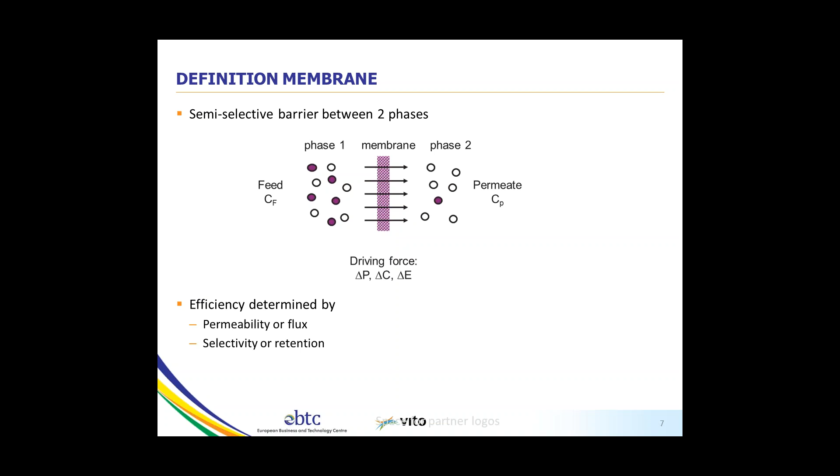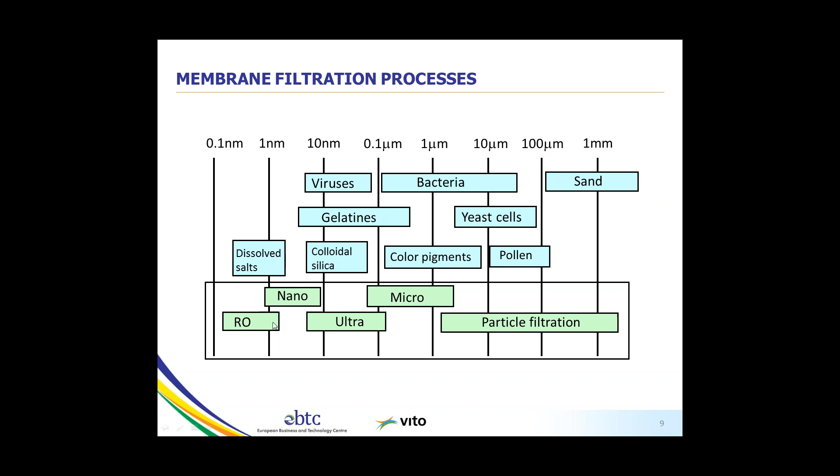This gives an idea: with microfiltration, you remove all the solids and part of the bacteria. With ultrafiltration, you have better removal of microorganisms, which is also important if you want to reuse the water, for instance in drinking water applications. Nanofiltration and reverse osmosis are used mainly for desalination.

The membrane market is a growing market, with a 10 to 20% annual growth rate. With the pressure-driven processes applied in water applications - microfiltration, ultrafiltration, reverse osmosis, and nanofiltration - you have more than 75% of all membrane applications. So it's the big market, so to speak.

The classification of membranes - well, you can choose different parameters to classify them.

Pore size is the usual way to classify them, as I mentioned before. But you can also classify them according to the structure of the membrane. The membranes used in water applications can be homogeneous, made of one material, or they can be heterogeneous.

Most of them are porous, and reverse osmosis is non-porous. Most of the membranes used in water applications are polymeric materials, but you also have inorganic membranes, like ceramics, used in water applications,

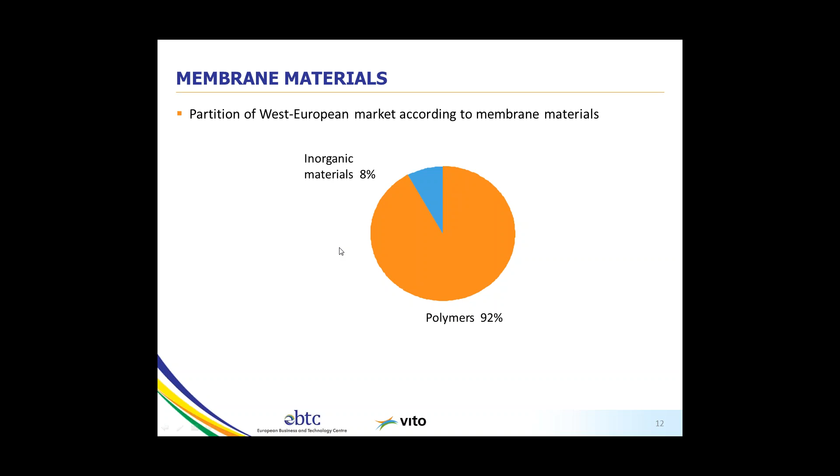You see that the majority of the membranes used worldwide, and certainly in the West European market, are polymeric membranes. It's only a minority that consists of inorganic materials, and most of the time they're used in wastewater under severe conditions, with acids, extreme pH, etc. So for classical water applications, normally you use polymeric membranes.

And pressure-driven membranes normally have a very thin skin layer, so they are asymmetric. The skin layer gives you good selectivity, and underneath you have either a finger-like structure or a sponge-like structure. Both exist in the water world, but this structure is necessary to give mechanical strength. It's only in the skin that you have selectivity. This is, of course, to have high fluxes and good selectivity.

The types of materials used, most of the time, are either hydrophobic polymers, PVDF, polypropylene, and Teflon, but for classical pressure-driven processes it's most of the time PVDF or polyether sulfone. For reverse osmosis, it's a thin film composite structure with polyamide on top of a classical polysulfone ultrafiltration layer. So it's an asymmetric structure, and it's non-homogeneous. You have two layers on top of each other.

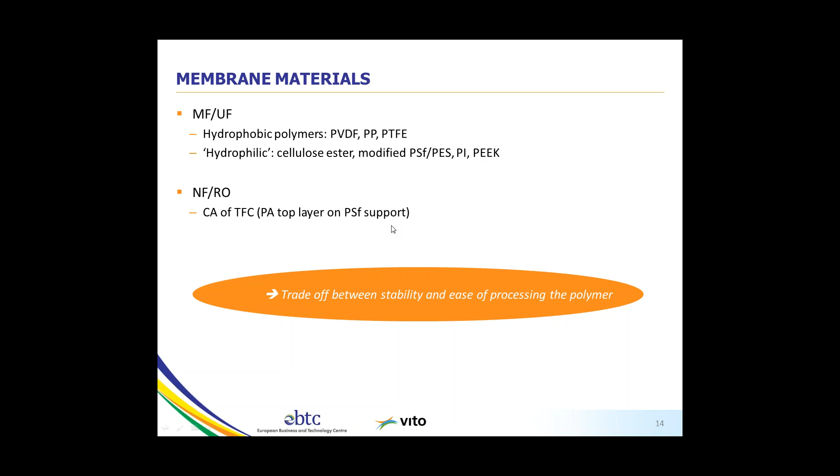The module configuration: you have flat sheet available. In water applications, normally the flat sheet is wrapped around a tube for permeate collection, and this is the way you make spiral wound membranes. I would say 90% of the membranes in water applications are spiral wound. If they are flat sheet, they are in spiral wound.

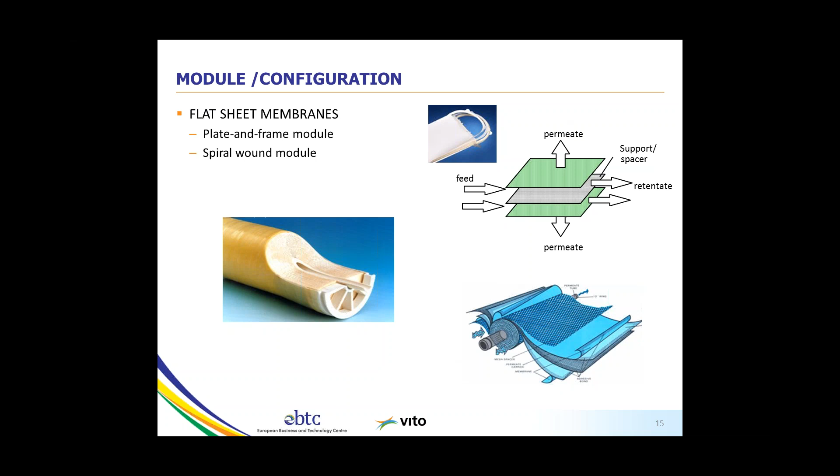The flat sheet can also be used as a flat sheet in a stack, and that is then for membrane bioreactors. The spiral wound modules are mainly used in reverse osmosis and nanofiltration.

Tubular membranes, you subdivide them depending on the diameter of the tube. You refer to tubular if the diameter is above 5 millimeters. These can be used in MBR, membrane bioreactor applications. Capillaries have a diameter between 0.5 and 5 millimeters, and hollow fibers are very thin, with a diameter below 0.5 millimeters.

At the edges, you need to pot them in an insert, and this is the housing of the hollow fibers. At the end you need a sealing, and this is done, most of the time, with a resin used for potting. Then you have the possibility to flow from the inside of the capillary to the outside, which is called inside-out filtration. Or you can flow from the shell side to the inside of the capillary for extraction of the permeate, which is called outside-in.

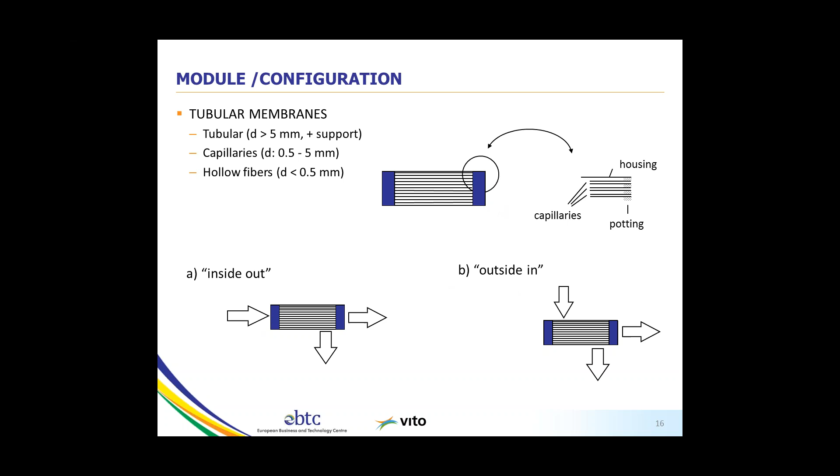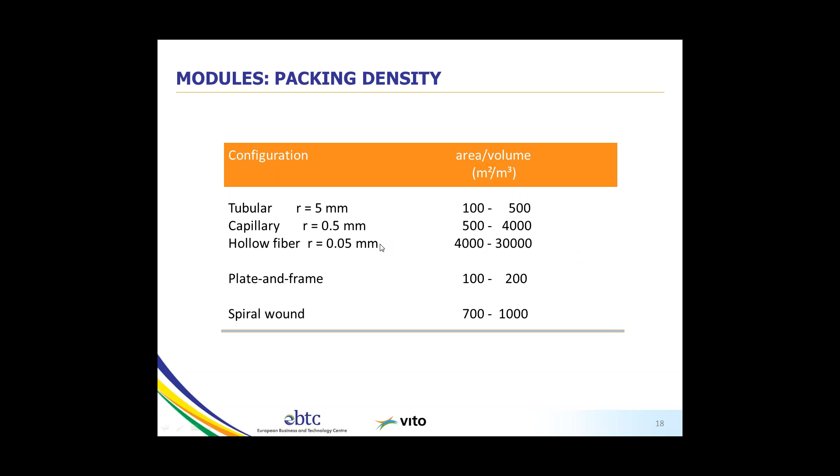Another way to look at packing density is area per volume, square meters per volume of the module, and you see that the champion for this parameter is the hollow fiber configuration. So if footprint is important and water quality is okay, you normally choose hollow fiber, if available, of course.

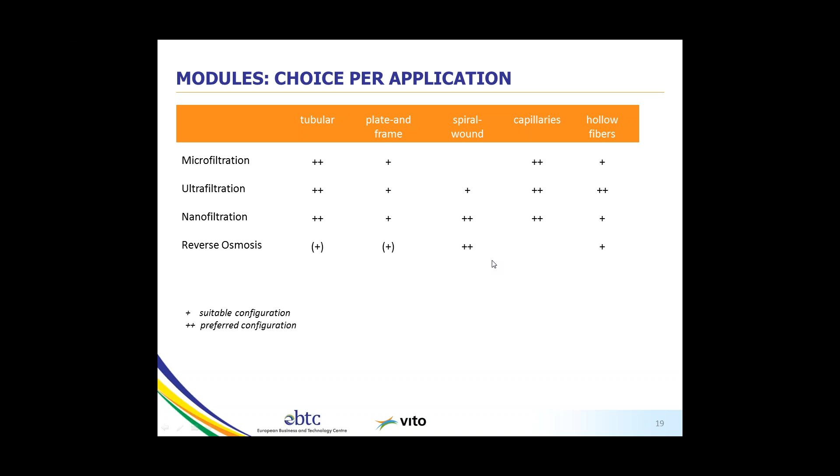And here is the availability: micro and ultrafiltration are available in tubular form, capillaries, and hollow fibers. Nanofiltration and reverse osmosis are most of the time in spiral wound configuration, so then you don't have the choice, of course.

Mode of operation: you can operate in dead-end, meaning the feed flows perpendicular to the membrane surface, like a coffee filter. Another way is you flow the feed across the membrane, and part of it is converted into permeate, whereas in dead-end filtration 100% is converted into permeate.

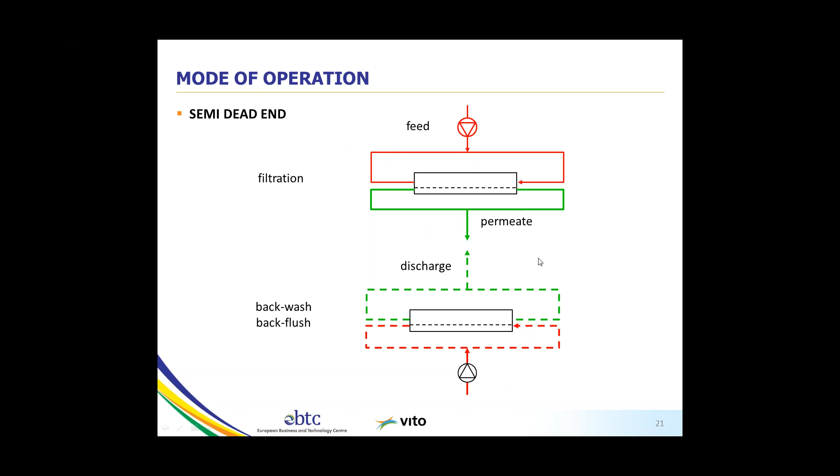A semi-dead-end operation combines a dead-end operation mode with a backwash. From time to time you reverse the flow and backwash the filter with clean water, and of course you have to discharge the cake layer.

Then you can choose for a single pass-through, or one pass-through, meaning the feed passes one time through one membrane module, or you can recycle part of the flow.

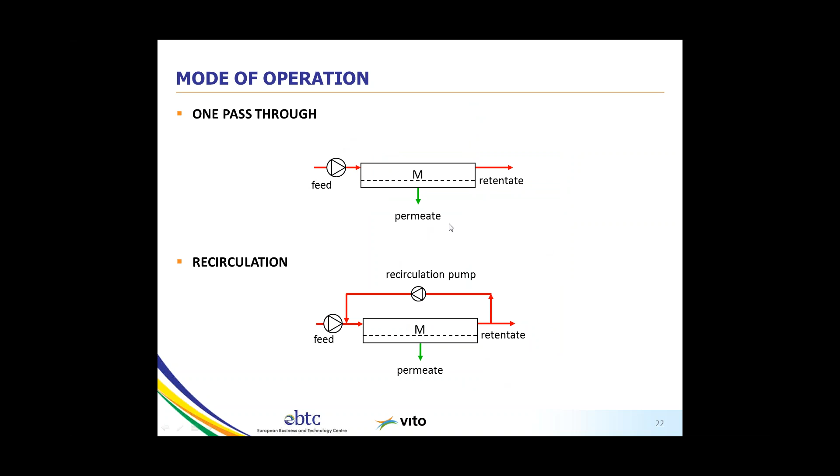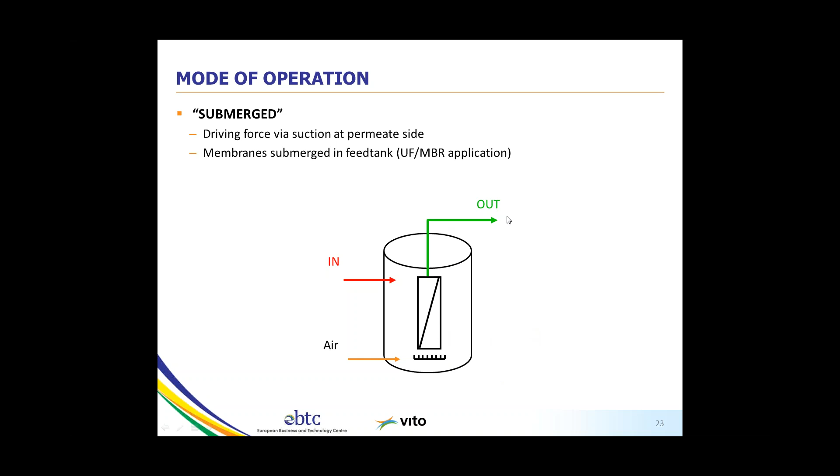This is a typical configuration for membrane bioreactors. In that case, you submerge the module in the tank, which we call the membrane tank. It's filled with sludge, and you suck out the permeate, so it's an outside-in filtration, typical for membrane bioreactors.

If you have a multi-stage system, you can go to higher recoveries. That's the reason why you stack them in a multi-stage configuration.

Let's go a little bit deeper into micro and ultrafiltration. We've seen in the last 10 to 15 years a real boost in micro and ultrafiltration as a replacer of classical sand filtration, for instance.

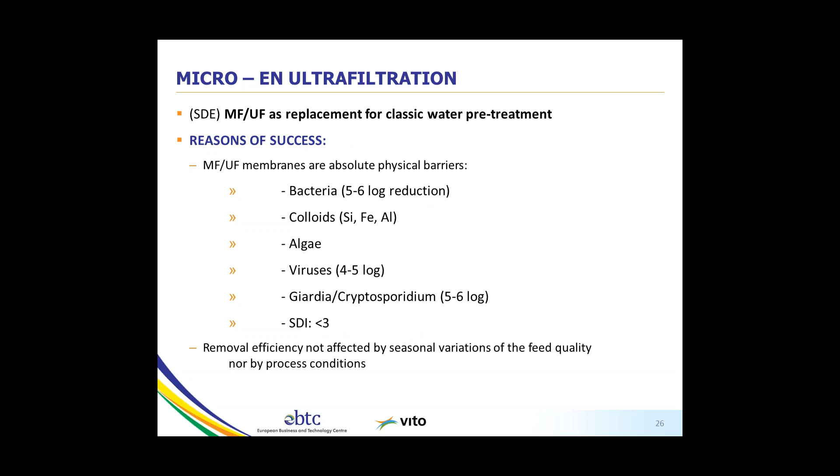Why? Because micro and ultrafiltration form an absolute physical barrier. That means bacteria, viruses, algae are retained nearly 100%. Here you see the log removal, so they are very well retained, certainly by ultrafiltration. This is important, you create very good quality water for irrigation purposes, or to post-treat, for instance, with reverse osmosis.

One of the reasons UF and MF are so successful is the development of hydrophilic membranes. Remember PVDF, which is in fact a more hydrophobic polymer, but there are ways to make it more hydrophilic so that you have higher fluxes. You can do this by surface modification, or with a blend of polymers. The result is a low pressure, high permeability membrane, with less fouling because there's less compaction of the cake layer.

We see a lot of improvement, and for surface water treatment, for instance, a classical yield is a flux of 100, which is quite high, with a membrane lifetime above 5 years. This is true for all membranes - they are modular and have a small footprint. These are other advantages.

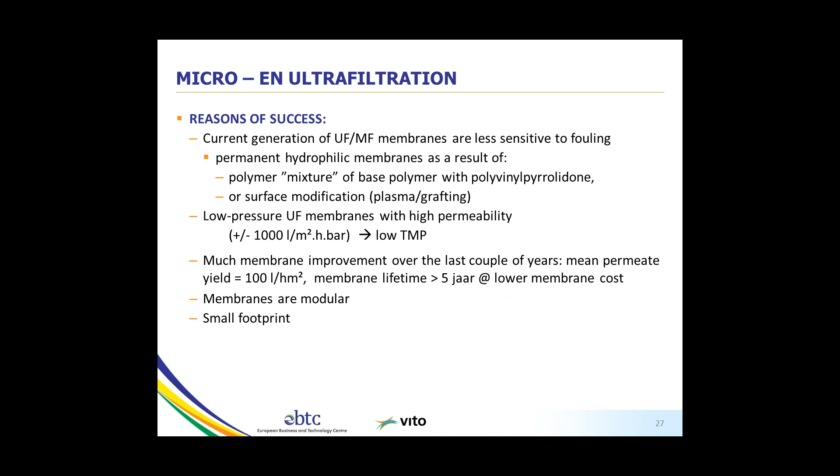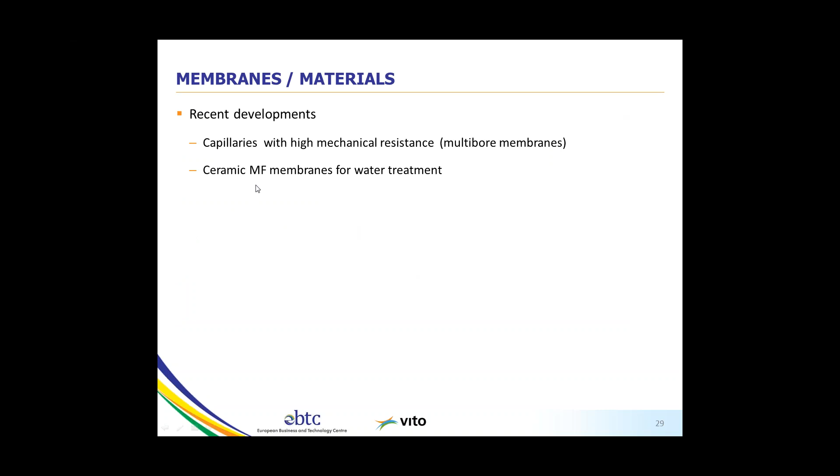As for recent developments, these are the multi-bore membranes of Inge. Inge is now taken over by BASF, but it's a new development. There are also ceramic MF membranes for water treatment.

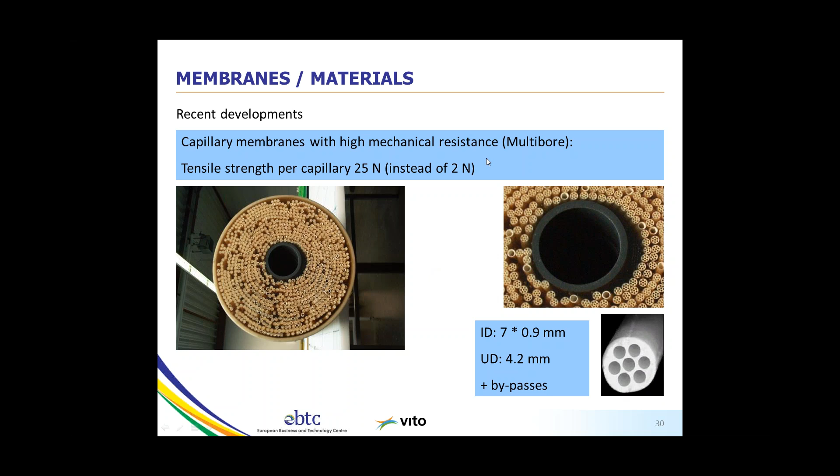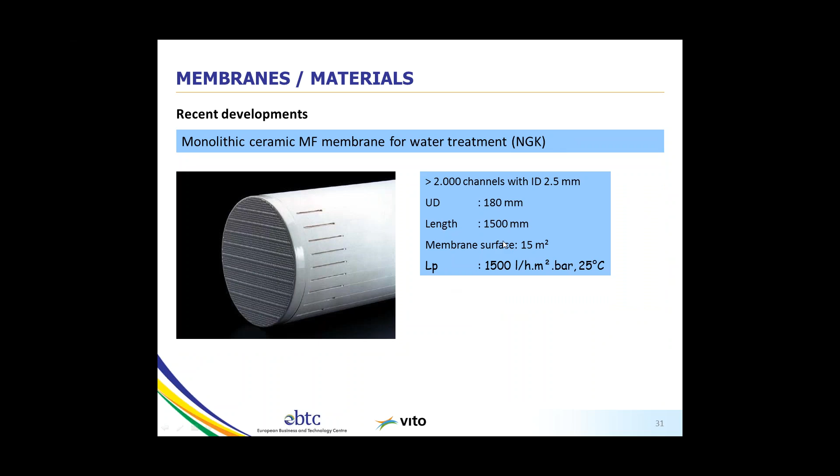And here you see the ceramic microfiltration. This is a Japanese development from NGK, and they claim very high fluxes.

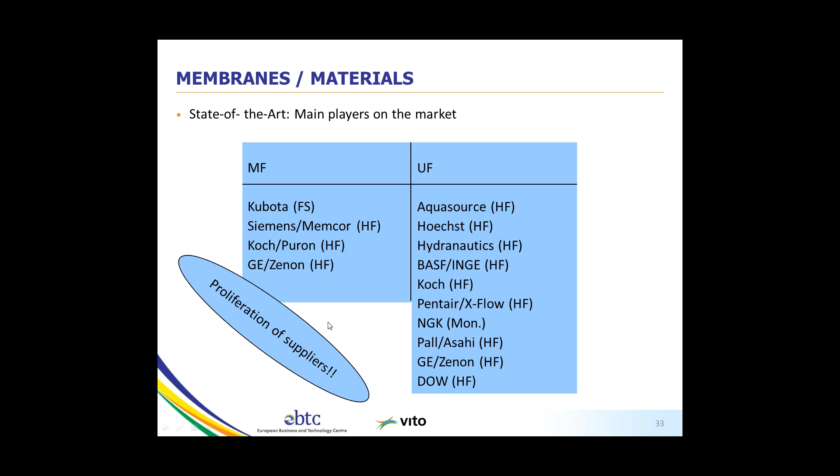This is a list of suppliers. Kubota is number 1 in MBR, flat sheet. HF is hollow fiber, FS is flat sheet. Here you see a number of well-known suppliers, for instance Dow, GE - these are the really big ones. But there is a huge proliferation of different suppliers, and they all have their own configuration and module size.

So what do you need to choose in case of an easy water? Easy waters are low in suspended solid content and low in organic content. Then you can choose for a small diameter and inside-out filtration. But if you have more difficult waters with high suspended solids, high organic contamination, and even sludge, then you have to choose other configurations.

For instance, if you still want to choose a small diameter, we recommend outside-in filtration. We also recommend a larger diameter, or even submerged systems with hollow fiber modules. Then there is a reinforcement on the hollow fiber so that you can backwash. And of course you also have the flat sheet for more difficult waters.

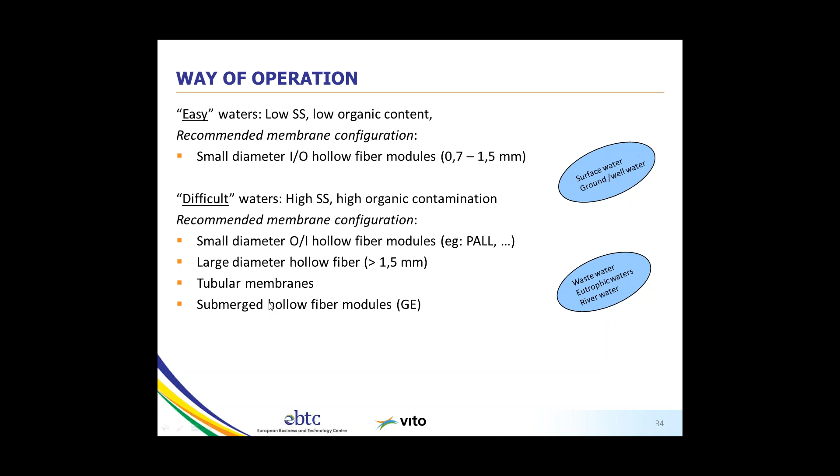For easy waters, you can choose a semi-dead end operation for surface water and ground and well water, but for more difficult waters, we recommend cross-flow.

This is a typical semi-dead end operation for surface water treatment, but also used for MBR applications. You have a typical cycle in dead end, then you revert the flow, and then go into backwash, and start again a new filtration cycle.

This is when the operation is very stable. You start after the backwash again at the initial TMP, so you have no fouling on your membrane. You only have a cake layer built up, but no irreversible fouling.

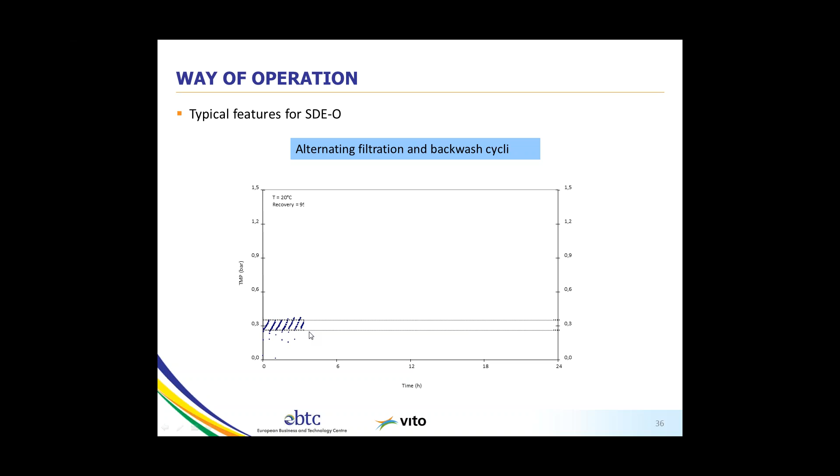A typical filtration cycle in semi-dead end is 20 to 60 minutes, and these are the typical fluxes. The backwash is typically 20 to 60 seconds, and the flux of the backwash is normally higher. This is to have some force on the membrane to remove the cake.

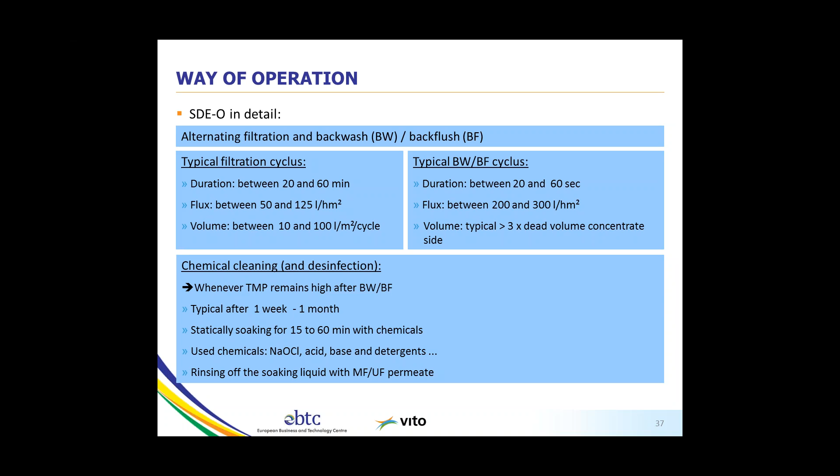Of course, you need from time to time a chemical cleaning. You can do an enhanced maintenance cleaning, once a week for instance. Or you can go for a severe cleaning with soaking time and sodium hypochlorite at higher concentrations. This depends on the degree of fouling.

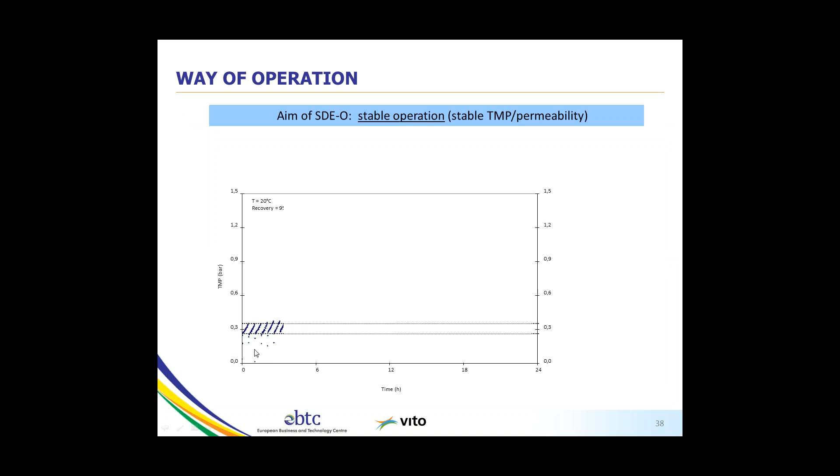So again, this is the slide I showed before. You have stable operation, but sometimes it can go wrong. And this is when it goes wrong. When you see this appearing, then you are in trouble.

That means that you have not a stable operation, and you see that the initial TMP after backwashing is rising, meaning that you have irreversible fouling.

Then you have to decide on a number of critical parameters like flux. You can decrease flux or you can decrease the recovery. It depends sometimes also on the feed quality, and then you have no choice, but you can anyway decrease flux and recovery. And of course, it depends also on the module type.

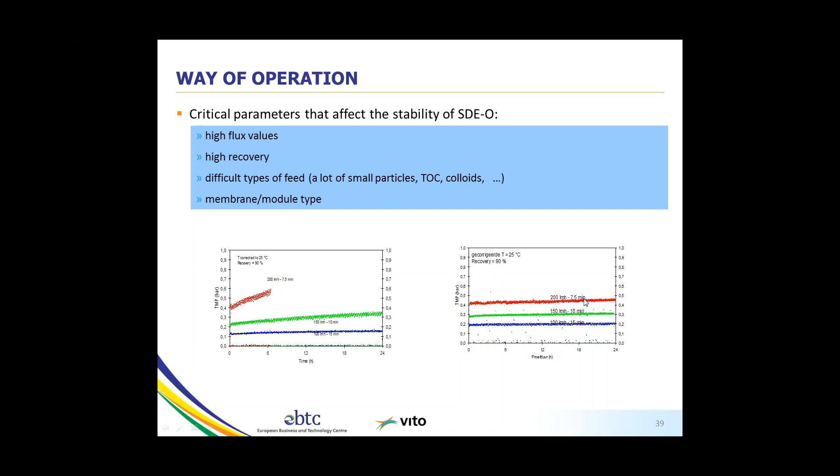You can combine the backwash with a forward flush to eliminate the dirt from the feed side, or with an airlift. Also outside-in you can use air, but then you need hydrophobic membranes. It's not very much in use for outside-in, and this is more typical for MBR applications, then you have relaxation in case you cannot backwash.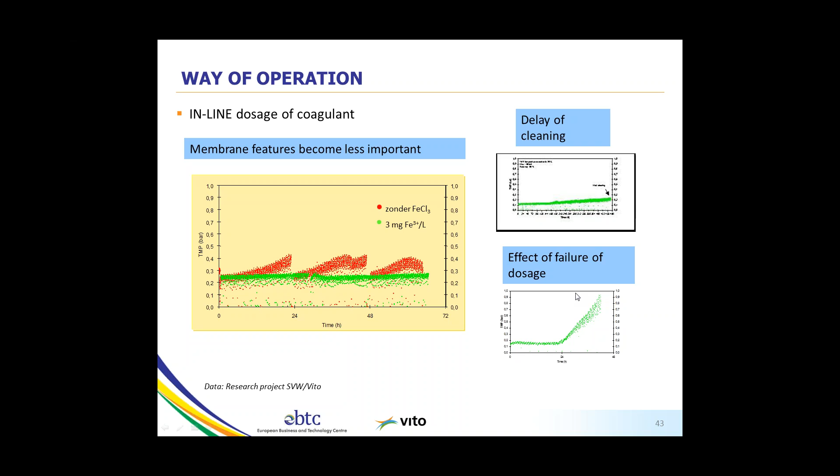Okay, these are the advantages I already mentioned on dosing flocculant. And these are the number of applications that you can have in water: MF and UF in drink and process water treatment, pre-treatment in the preparation of ultra-pure water, recovery of rinsing water, purification of chemicals, and you can imagine a number of other applications.

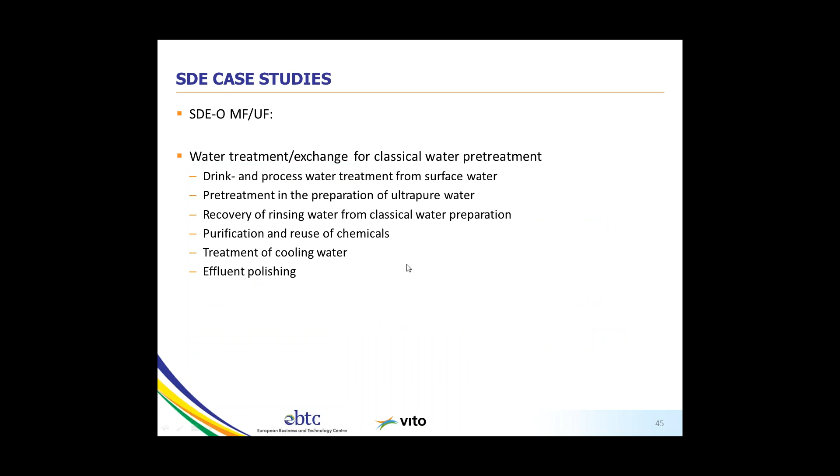There is one case, but I will not go into detail because of time limit, but you will have the slides later on, and you can see how the conditions are, the objectives, the water treatment scheme, here schematically. So it's the implementation of a double barrier system, UF and RO, in combination with ion exchangers, that was applied in the Netherlands. It was one of the first full-scale installations.

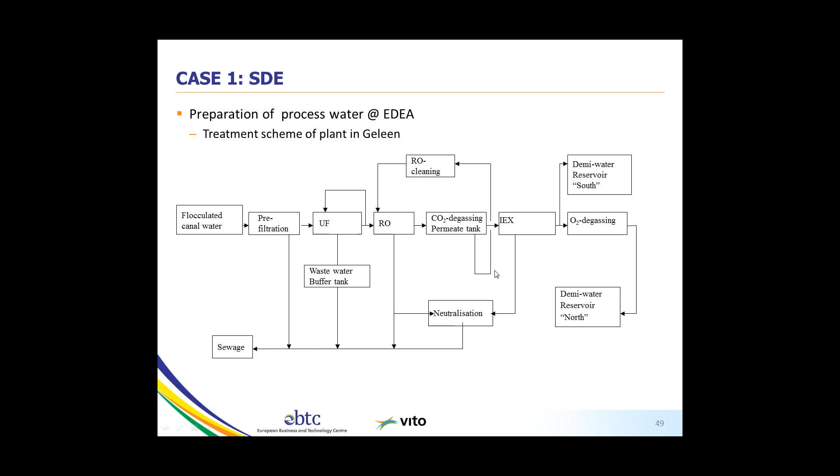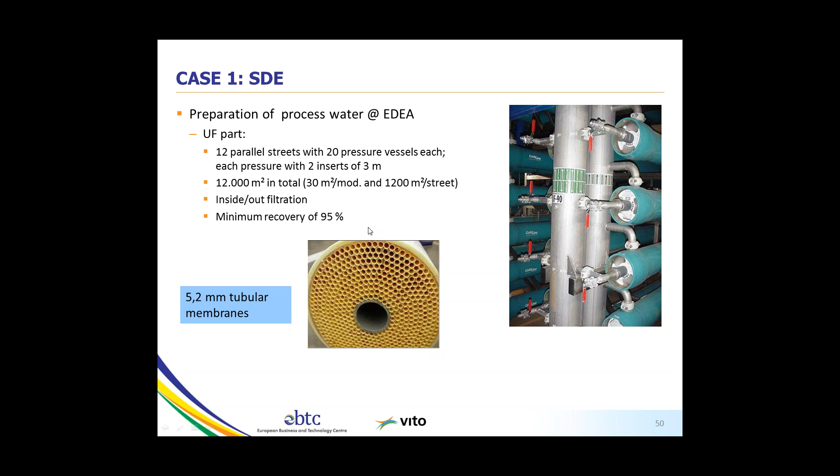So these were the problems. At the beginning it was under-dimensioned, so they had to install 2 additional UF streets, and meanwhile they also added inline dosage, and since then they are very satisfied with the installation.

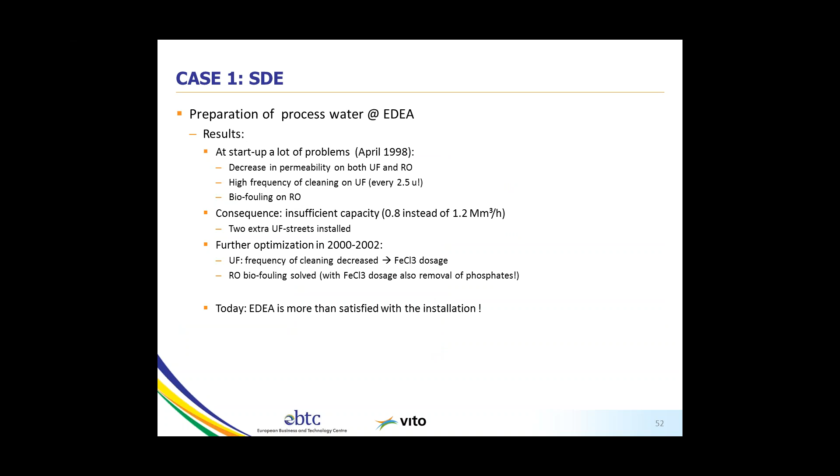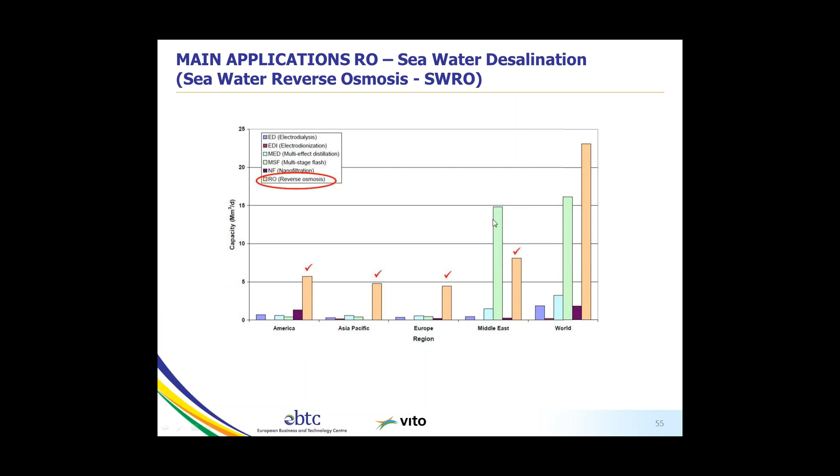I skip this one. This brings us to reverse osmosis and nanofiltration. Reverse osmosis is in fact at this moment in most of the world the number one technology for desalination, except for the Middle East, but that is because of historical older installations based on thermal processes. So you see that from, let's say, end of 2000, reverse osmosis is a dominant technology in seawater desalination.

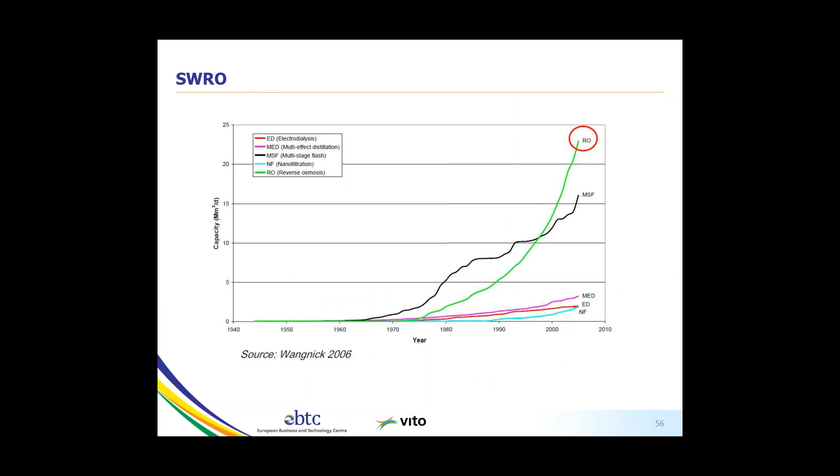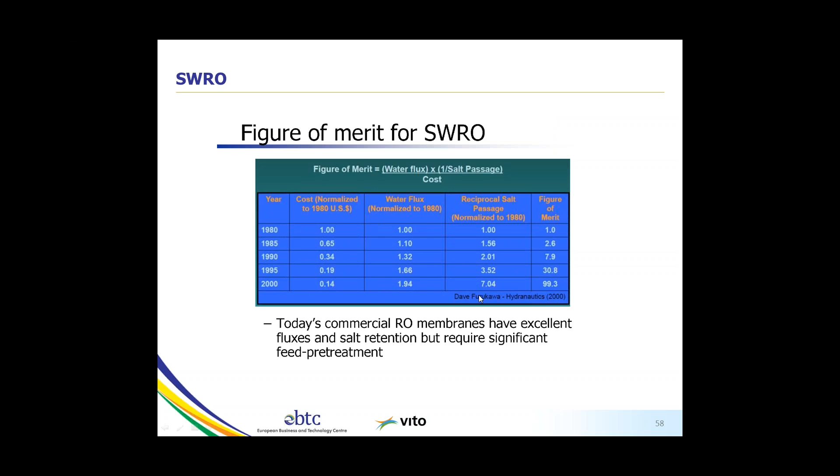This is mainly because of the energy recovery on the brine side and the improvement on the membrane and modules. So you see at this moment, RO plants are typically 5 to 10 times more energy efficient compared to classical thermal desalination plants. This gives you an idea how well the improvement was. From 1980 up till now, we have a cost reduction factor of 7, a flux that has been doubled, and also a factor 7 better retention in salt. So there has been a lot of improvement.

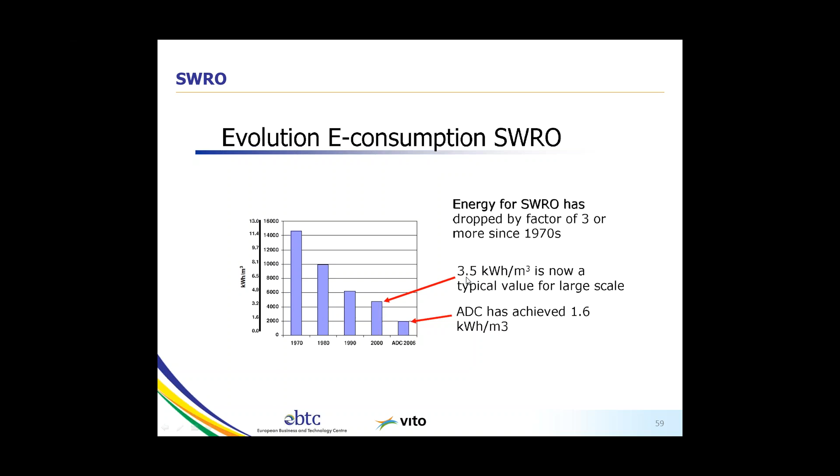The difference with nanofiltration: this is a reverse osmosis membrane, so the salt retention is high, above 99%. In fact, nanofiltration is, so to speak, a reverse osmosis membrane with defects, in a controlled way. The larger the defects, the lower the retention. And you see for nanofiltration that you have a low retention for monovalent ions and a high retention for multivalent ions.

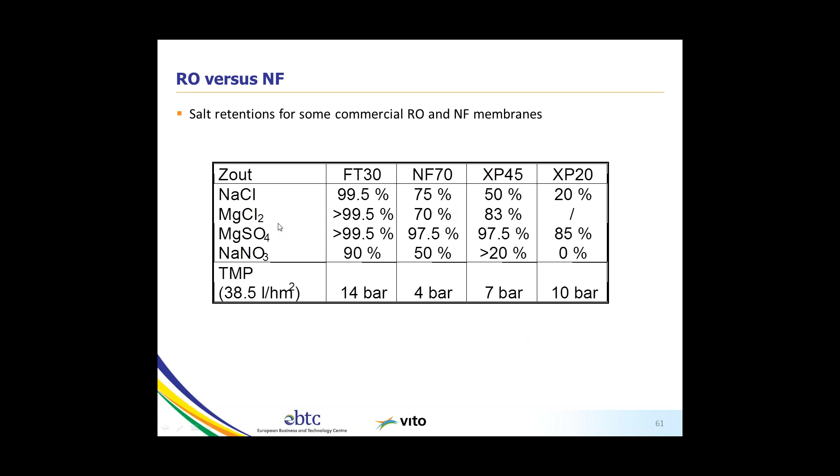So nanofiltration is one of the youngest pressure-driven processes, and it's also growing, especially in drinking water applications, for partial desalination and softening of drinking water.

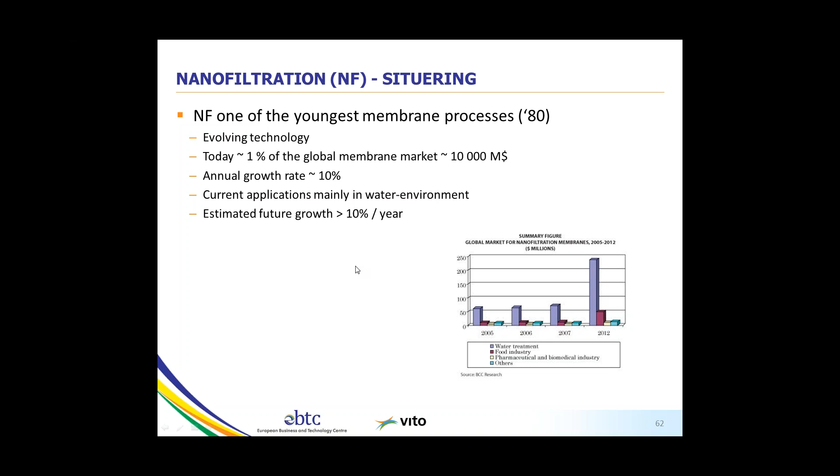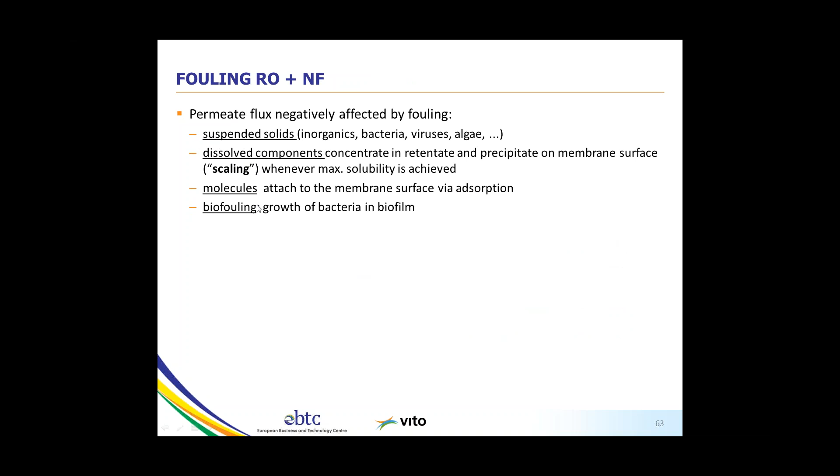In case of NF and RO, they have a spiral wound configuration. This means that the water should be pre-treated carefully. So you have to remove suspended solids, you have to remove dissolved components like ions that can scale, or you have to do something to avoid scaling, because you will retain ions. And biofouling—also to avoid biofouling, you need pre-treatment. So you have to avoid fouling, and that means an extended pre-treatment.

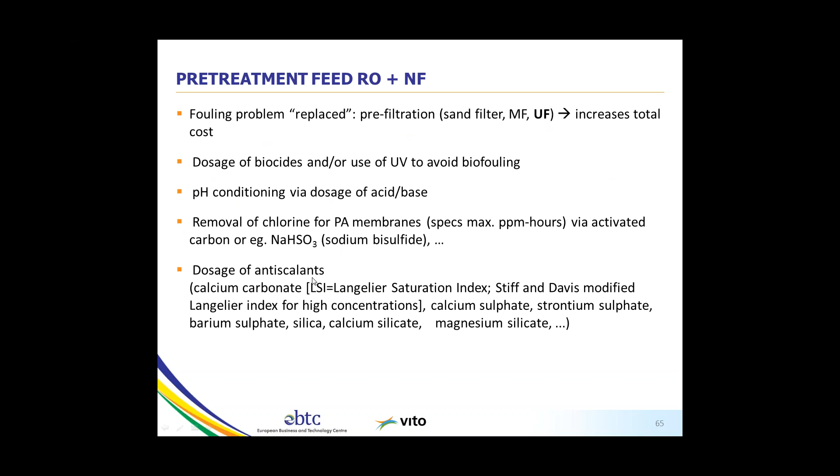Here you can pre-treat the water, preferably by ultrafiltration, to have the best quality. In addition, you can dose biocides, or you can do a pH conditioning to avoid scaling. In case you have chlorine in the water, you need to remove it for the polyamide membranes, otherwise you have damage of the membrane. And then you need also to dose antiscalants.

These are a number of suppliers. The number one is Dow, and the number two is Toray. But these are well-known suppliers of NF-RO membranes.

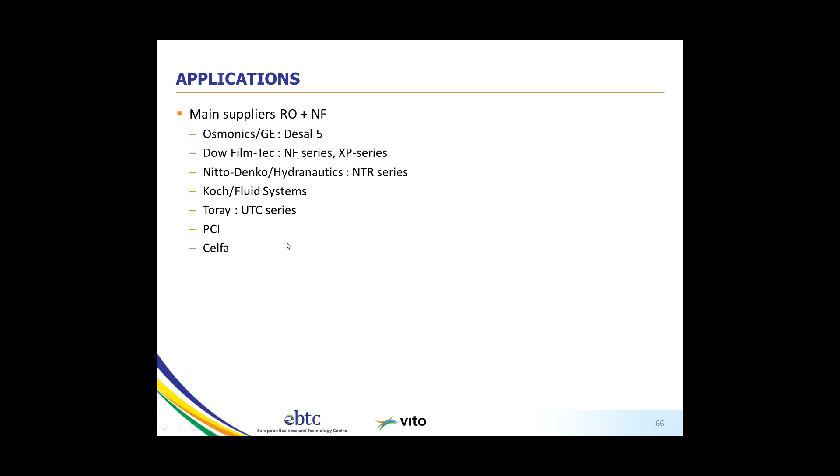And this is an example. I was involved because I was working for Keppel Seghers at that time on this plant. It's in Ulu Pandan in Singapore, for the production of NEWater. It's a public-private partnership with PUB, and it's one of the biggest in the world, 6,000 cubes an hour. The effluent coming from the biological activated sludge system is pre-treated carefully with a strainer, then in this case a UF membrane, and then a reverse osmosis, then the new water storage tank, and then it's ready for distribution.

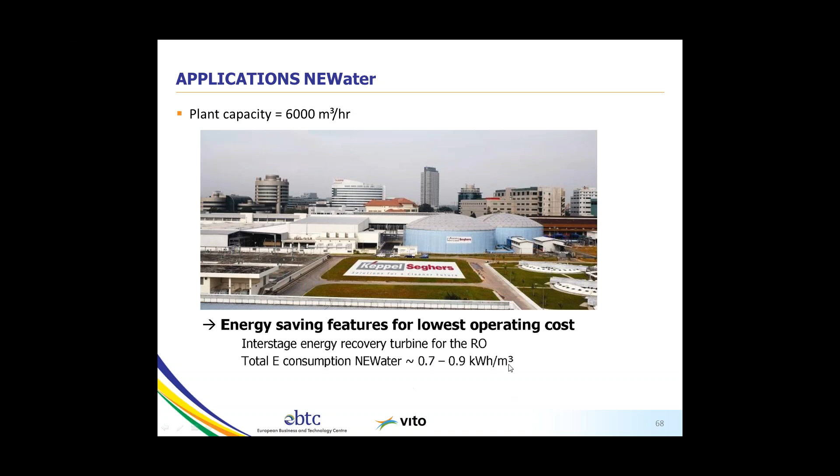This is how it looks—it's a real water factory, so to say, and these are the typical energy figures for the whole plant. This is the reverse osmosis part. Okay, this one I will skip due to time concerns.

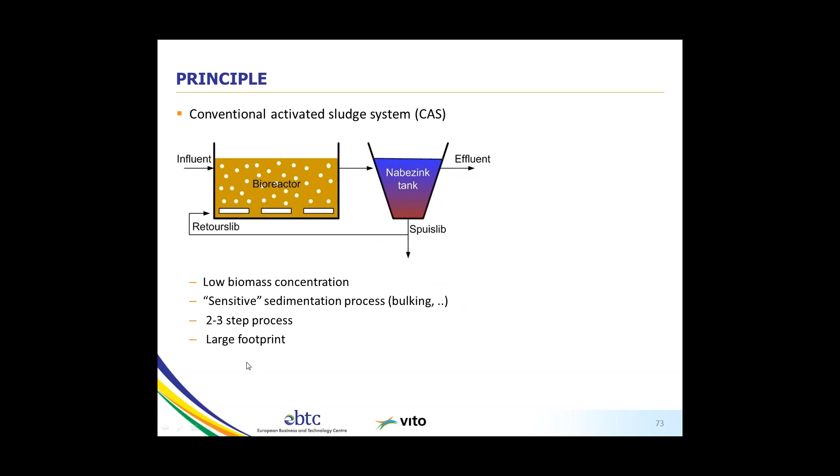MBR, in that case, you have an activated sludge reactor. This is a classical reactor where you have a bioreactor and you have a settler. In case you have a sedimentation problem, you have bulking of the sludge, then the effluent quality goes down. Also, you have a large footprint, so why not submerge a membrane in the bioreactor tank?

The effluent quality is much better. You can keep the sludge in the tank anyway, also in conditions where there is bulking, and the quality is better, so you can reuse the water.

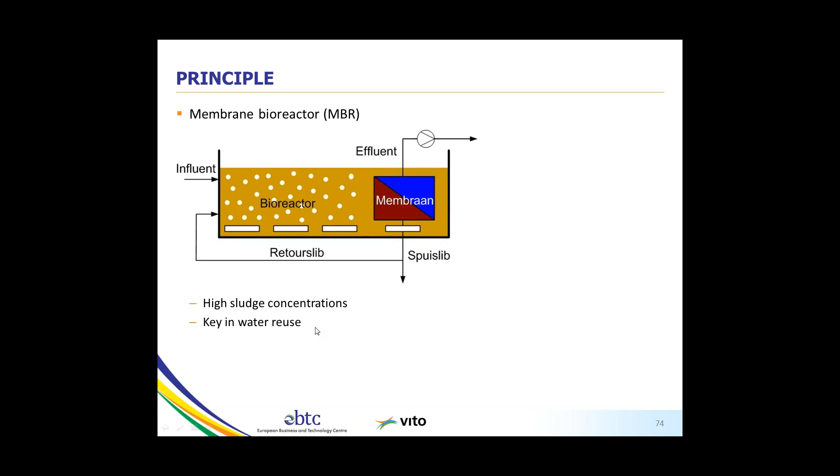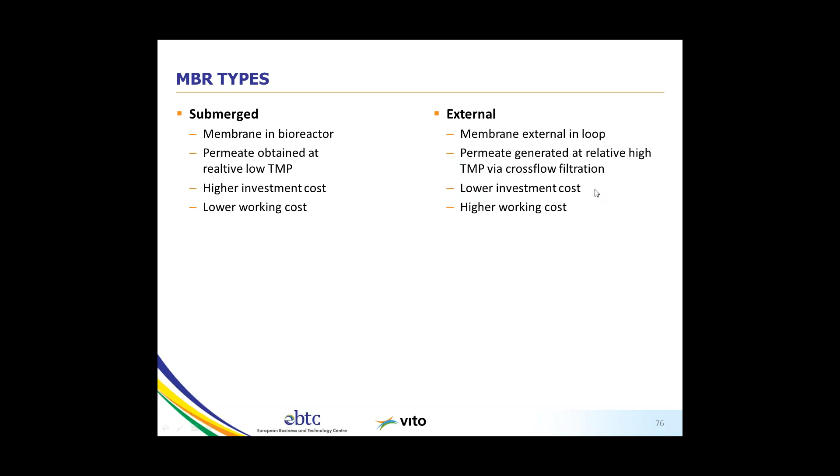And then there are two systems: you have an external loop—for instance, the Pentair tubes are used in an external loop in cross flow—or you can submerge the system. Most of the systems that you find in the MBR world are submerged. Submerged, well, you need more surface, but you have a lower working cost. In case of an external loop, you have the cross flow, so this is higher working cost, but you need less surface, so lower investment cost.

Here are the typical fluxes for a submerged system compared to an external system, and the typical energy consumptions also. In case of a submerged system, you need air scouring to clean the membrane, so this is, of course, also an additional cost in energy.

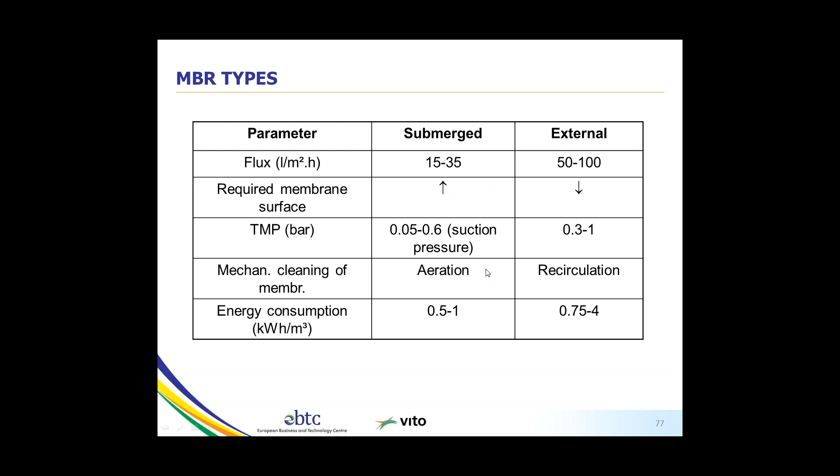In case of MBR, you can have higher sludge concentrations, from 10 to 15 up to 30 grams. Of course, this is a little bit higher. Normally, for typical MBR, it's about 15 grams per liter. You have higher sludge viscosity, meaning lower oxygen transfer. You have to take that into account, but the big advantage is smaller footprint and also lower sludge production.

You have a higher sludge retention time, so you can decouple the sludge retention time from the hydraulic retention time. Typical hydraulic retention time is minimum 4 hours, but typically 8 hours. Also, the flux will be a little bit smaller compared to a classical activated sludge system.

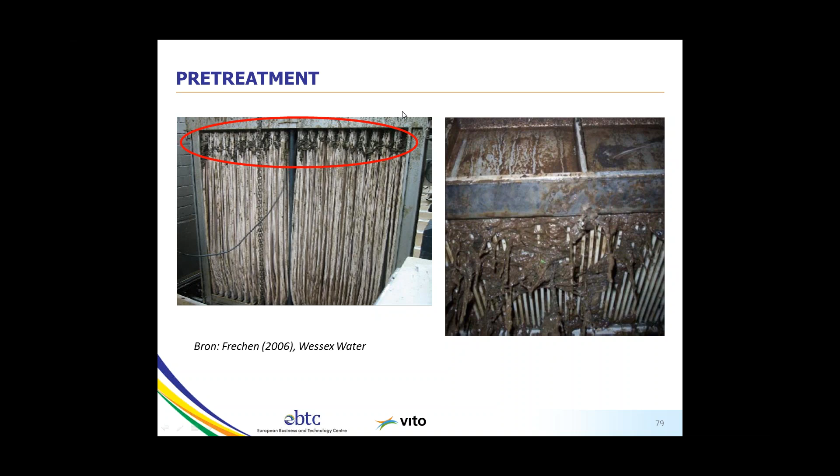Here you see how a module looks like if you lift it out, and you see that there is a lot of clogging. So pre-treatment is again very important to avoid this clogging. This can be done with a fine grid, but 3 millimeters is in fact necessary for flat sheet membranes. For the hollow fibers, you need a coarse sieve of 1 millimeter minimum.

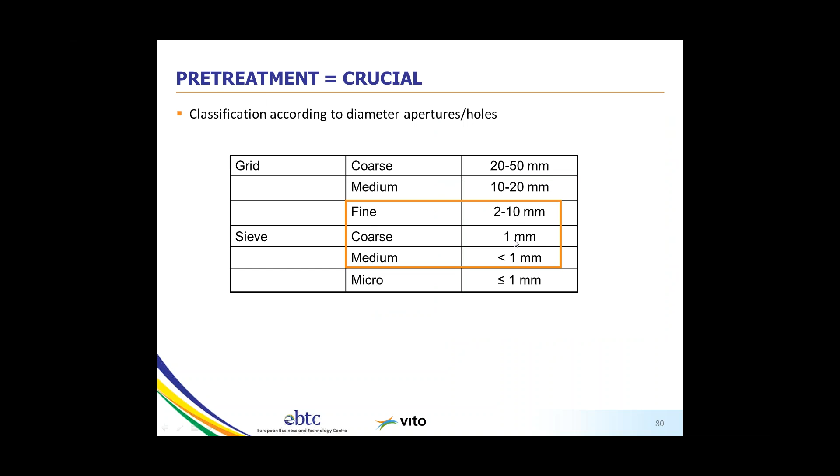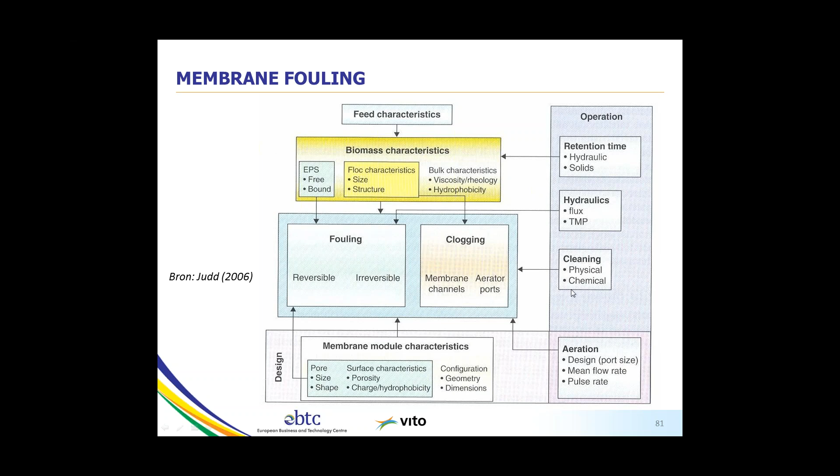Normally in MBRs you have a relaxation period for the flat sheet because you cannot backwash. For the ones that can be backwashed, the reinforced ones, you have filtration and backwash. In case of the flat sheet, normally you have filtration and relaxation. This is the way of operation.

You also need enhanced maintenance cleaning, and sometimes you need a severe cleaning, 1 or 2 times a year.

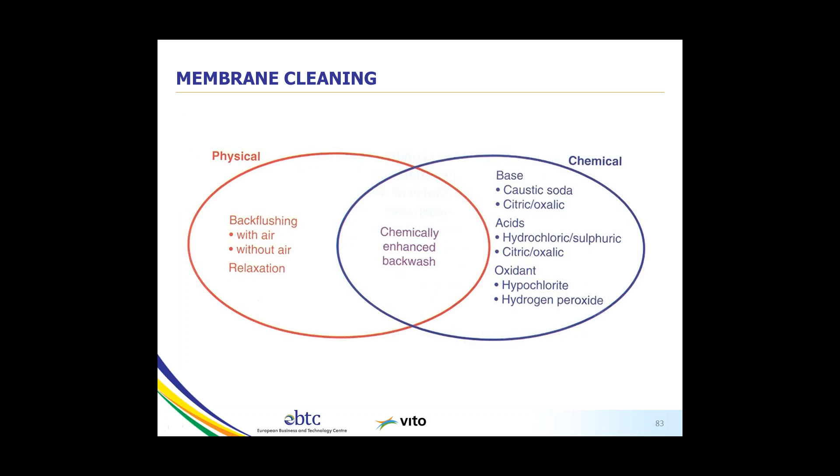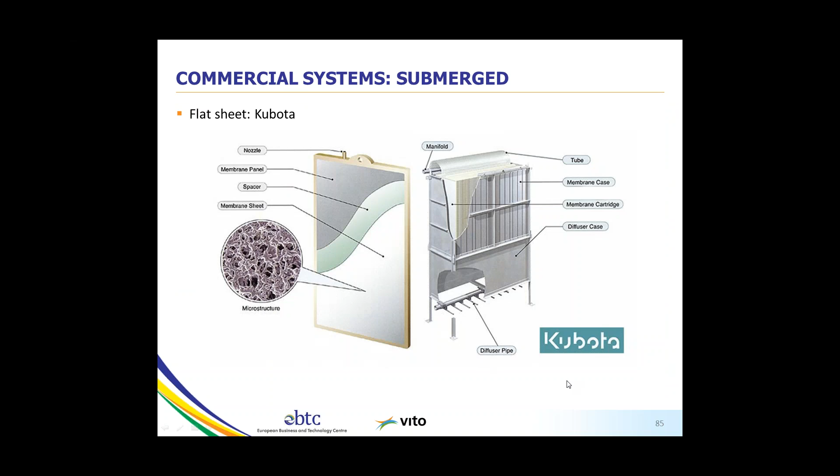Again, the configurations going from flat sheet, tubular, to hollow fibers, you have them all. Here are a couple of suppliers. Kubota is the number 1 in flat sheet. Huber is a European player, a German one. They also have flat sheet, and it's a rotating system.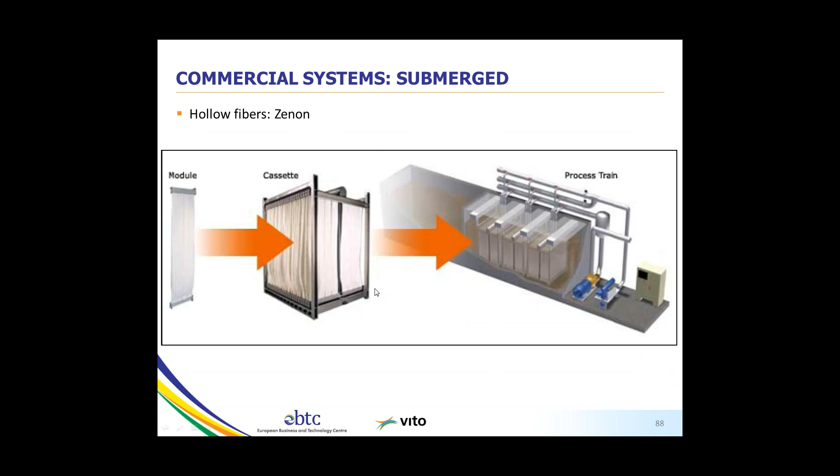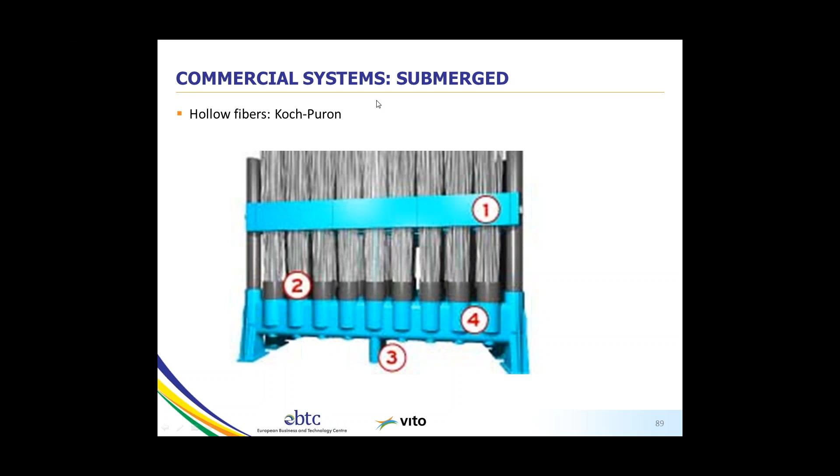Zenon is in fact the number 1 for MBRs. Zenon is acquired by GE, of course. They make use of reinforced hollow fibers. This is a Koch-Puron type of module, so they are potted at the bottom side, and the top side is open. This is the X-Flow, now acquired by Pentair. These are the tubular ones with airlift.

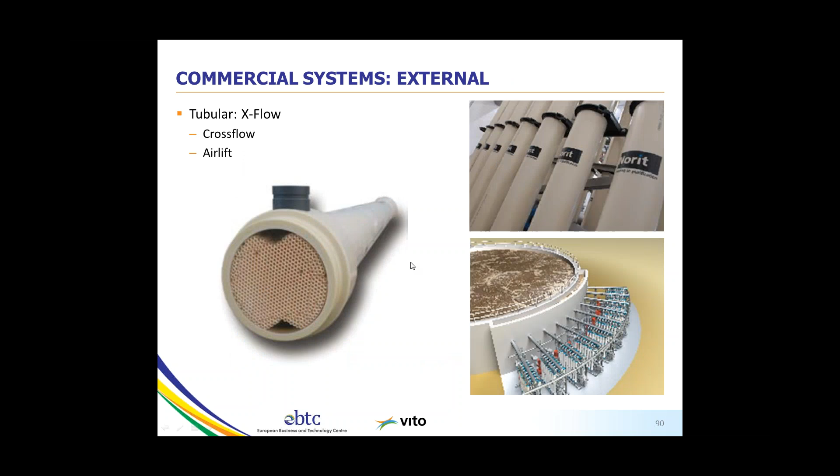One of the main advantages of MBR is a smaller footprint, but also better effluent quality, so you can send the water directly to a reverse osmosis unit for reuse.

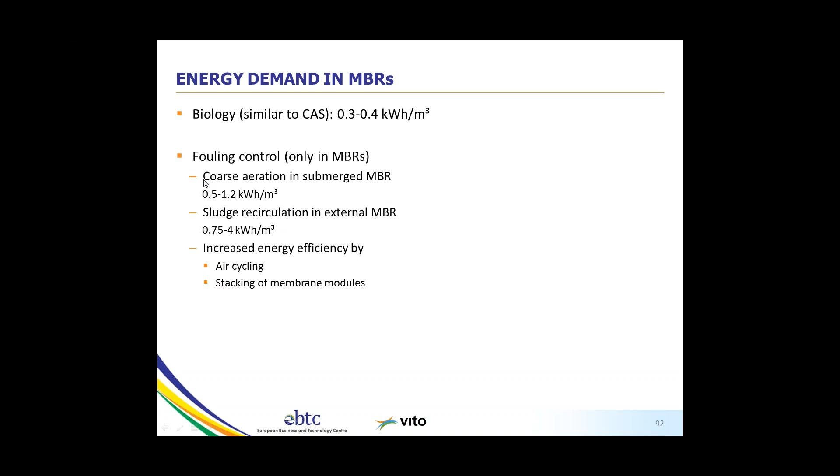These are typical energy consumptions for the aeration in the MBR, and this is for the sludge recycling. You see that the external MBRs use more energy compared to the submerged systems with air scrubbing.

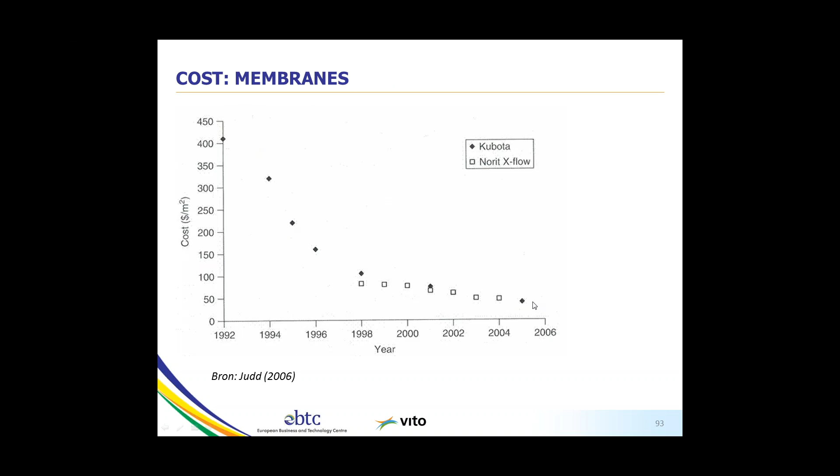This one I will also briefly touch upon. These are two comparisons between two MBRs with the same type of membranes, but Nordkanal in Germany is a larger plant, and Varsseveld is smaller and has a separate MBR tank, whereas in Nordkanal you have it integrated, so the membranes are submerged in the aeration tank without any division into a membrane tank.

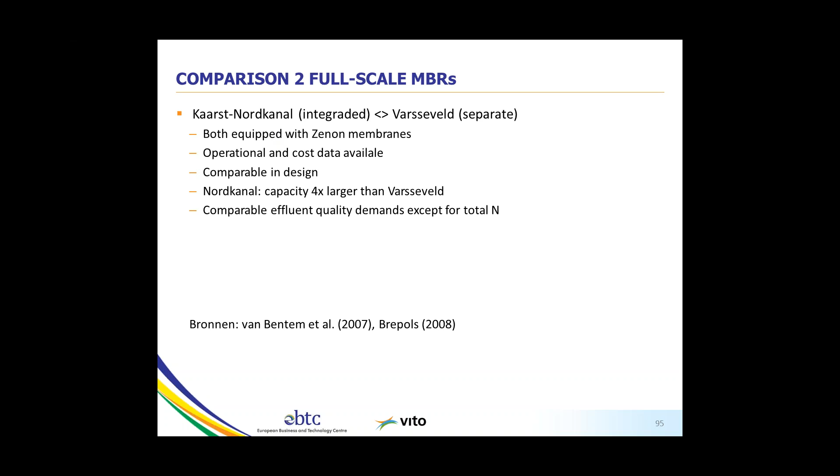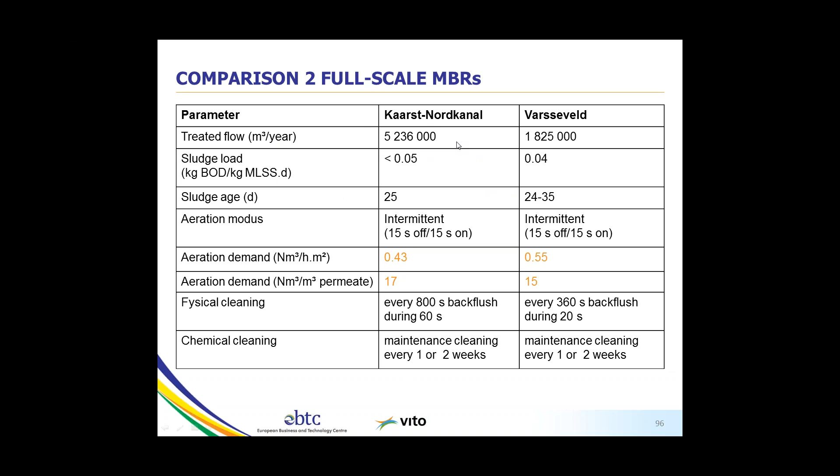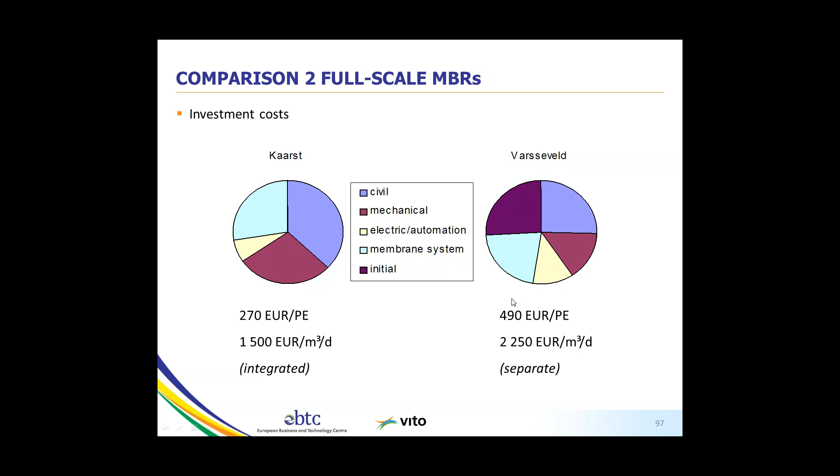Have a closer look at it later, but these figures are quite similar, except that Kaarst-Nordkanal is larger, and this results in a lower cost for Kaarst for two reasons: it's a larger system, so economies of scale, but also because it's an integrated system, whereas for a separated system you pay a little bit more, and this is also a smaller system.

I have a couple of minutes left, so I'll briefly touch upon a couple of developments. There will be a workshop later on, the last week of November, where we will elaborate in more detail, especially on the MBR part, because that is an application close to the market, where we are going into a spin-off in the course of next year.

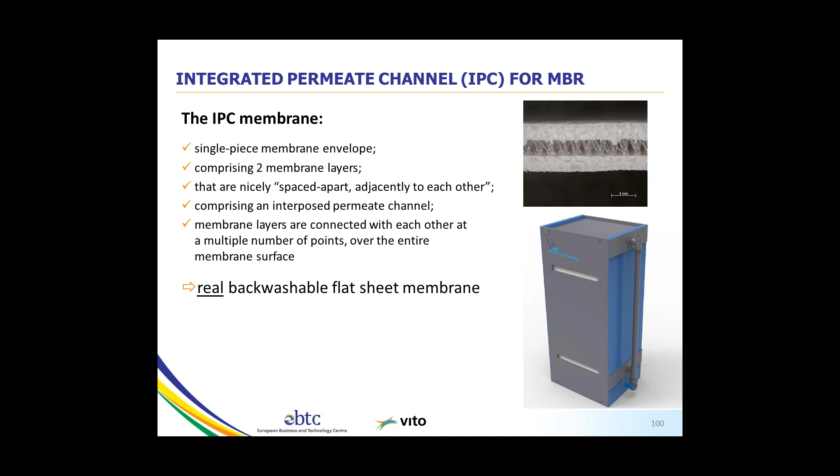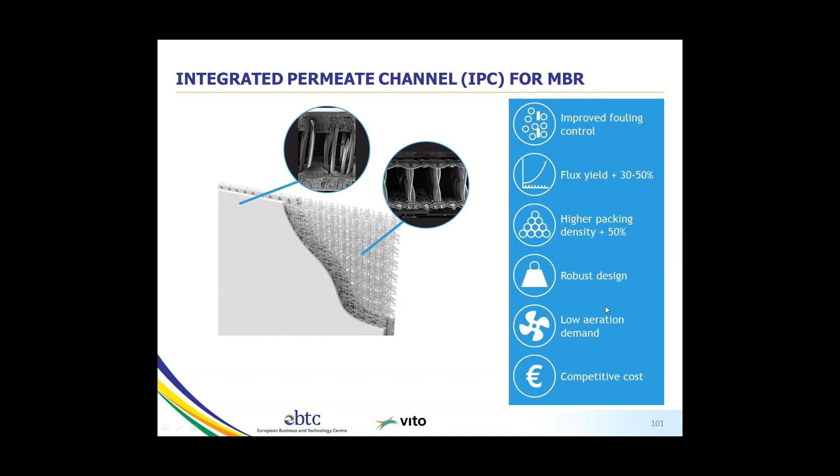Here are the advantages summarized: improved fouling control, fluxes up to 50% higher, and a higher packing density compared to Kubota because the thickness is only 3 mm, whereas a Kubota envelope is 6 mm. It's a robust design, and with a triple deck configuration we have low aeration and can produce it at a competitive cost.

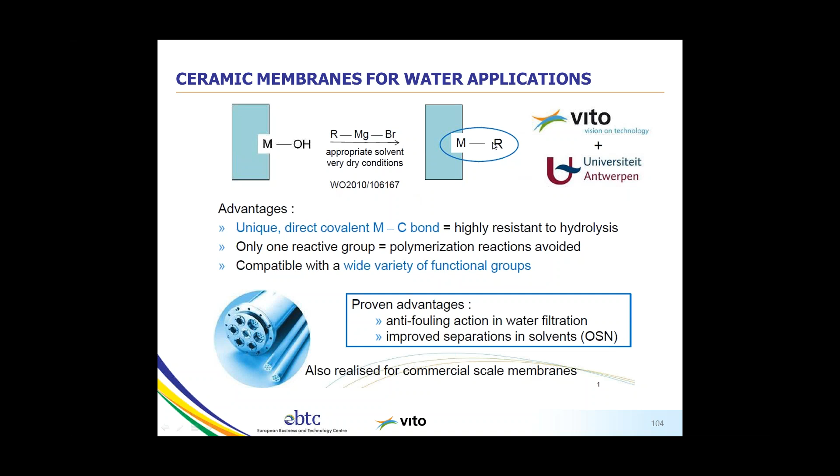The last development I want to show is on ceramic membranes. We normally develop them for solvent filtration, but we have one development on water applications whereby we modify the ceramics. It's a Grignard reaction, a patented method, where the OH is replaced by an R. In case of water applications, this R is methyl, and this gives very good results.

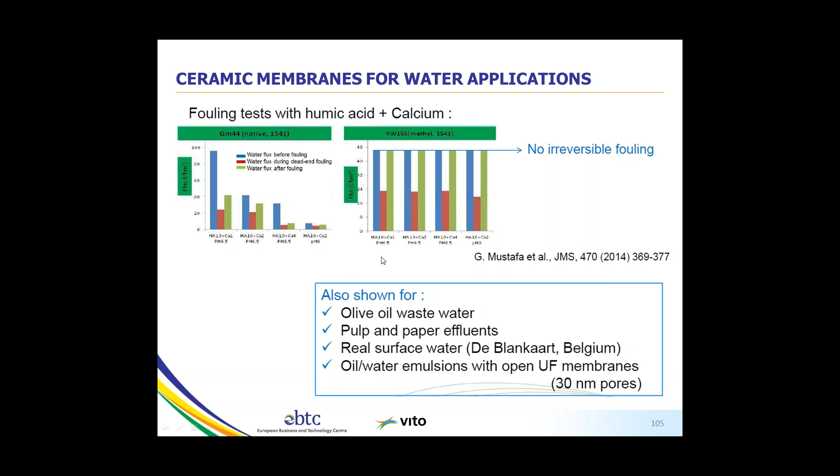These are quickly a number of developments at VITO, and I also want to highlight that we have a last seminar on Monday next week, which will be on membranes in biorefineries. That is my presentation, and I recommend also the next seminar next week.